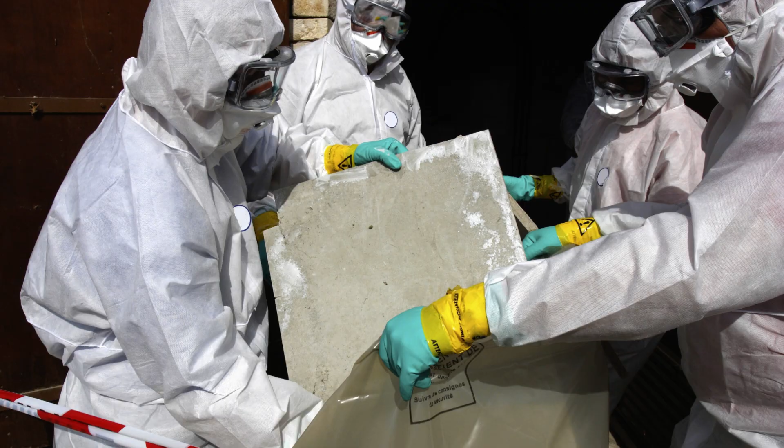Thank you for joining. I want to talk today about our current approach to managing asbestos and beyond 2026 as well. So, specifically looking at the challenges we already face and those that we may face in the future, and how we could be best placed to try and address those and maybe even solve some of those problems.

The duty to manage asbestos. It's been in effect since 2002 with the release of the Control of Asbestos at Work regulations when it was formally introduced in the UK. That means we've had 24 years now of the duty to manage. It also means we've had approximately 120 years of using asbestos in the UK with zero legal requirement for us to assess or manage the risks from asbestos in buildings.

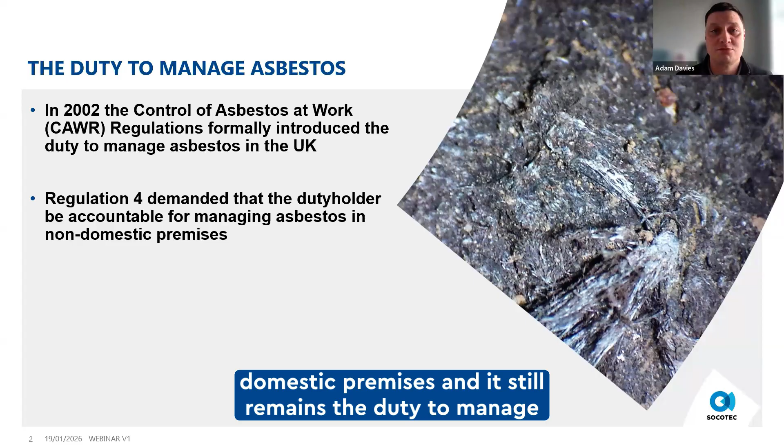It demanded, under Regulation 4, that the duty holder be accountable for managing asbestos in non-domestic premises, and it still remains the duty to manage in non-domestic premises. It demanded that a suitable and sufficient assessment is required to ascertain, firstly, do you have any asbestos, or is it liable to be present in the buildings? So an initial assessment to undertake and to ascertain whether there is any asbestos or not. Crucially then, where asbestos was identified or presumed, the duty holder then must employ a plan to prevent exposure.

Even though 2002 was the year that it was formally introduced, it remained mostly unchanged in the 2006 Control of Asbestos regulations and the current iteration of the regulations, CAR 2012. So we've now had at least 14 years since the latest iteration of the regulations. So what I want to explore is what has changed in these 14 years, how does that maybe impact on our approach to asbestos management, and then what we can do about that. There are things that we already have in existence that we could maybe employ, and maybe a different approach or mindset towards how we're currently managing.

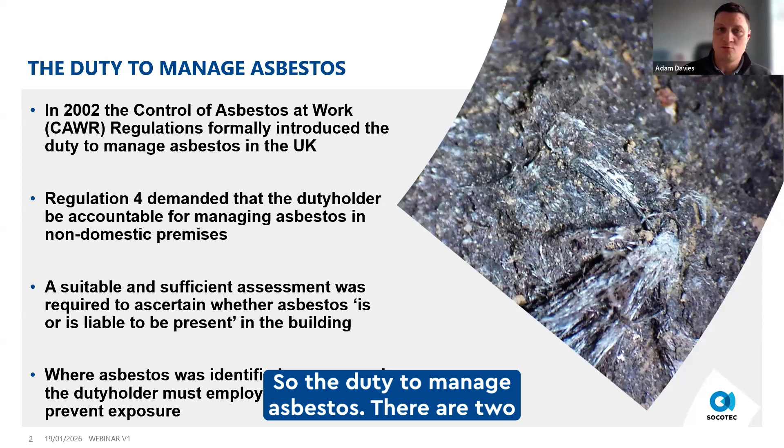I titled it, Can We Still Manage Asbestos in Buildings? Absolutely. I'm certainly not going to be talking about we need to get rid of all the asbestos, but we do have some challenges, and certainly lifespan is something I'll talk about. So the duty to manage asbestos, there are two elements really that I want to focus on in this webinar and certainly explore. So the first is Regulation 4.9.

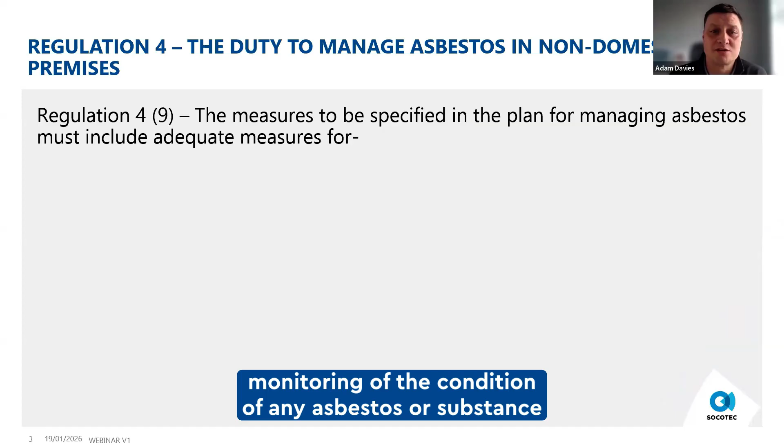The plan for managing asbestos must include adequate measures for the monitoring of the condition of any asbestos or substance containing or suspected of containing asbestos, and that we ensure that any asbestos or any presumed or likely substance is properly maintained or, where necessary, safely removed. So it's that adequate measures element, the continuous monitoring, and the maintaining or safely removing asbestos.

Our visual only inspections that most of us currently do, the re-inspections, they are only visual. Are they still an adequate measure for monitoring materials that have been in place for many, many years? Could it be argued that some ACMs can no longer be properly maintained and should therefore already be planned for safe removal? And then Regulation 4.10.

The duty holder must ensure that the plan is reviewed and revised at regular intervals and without delay, and then that little one, if there's reason to suspect the plan is no longer valid. It's quite often the case that we have a plan in place and it's regimented, every 6 months, every year, we review it. And it's just remembering that critical element: if there's reason to suspect it's no longer valid. Certain materials currently included on the plan may trigger an automatic revision if they're identified as being unable to be properly maintained.

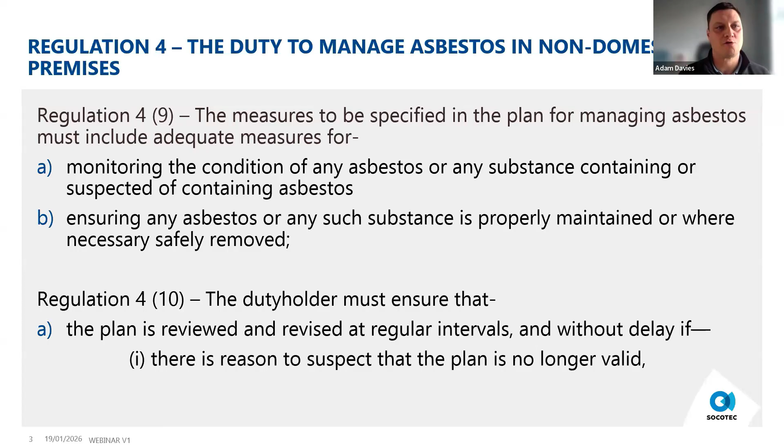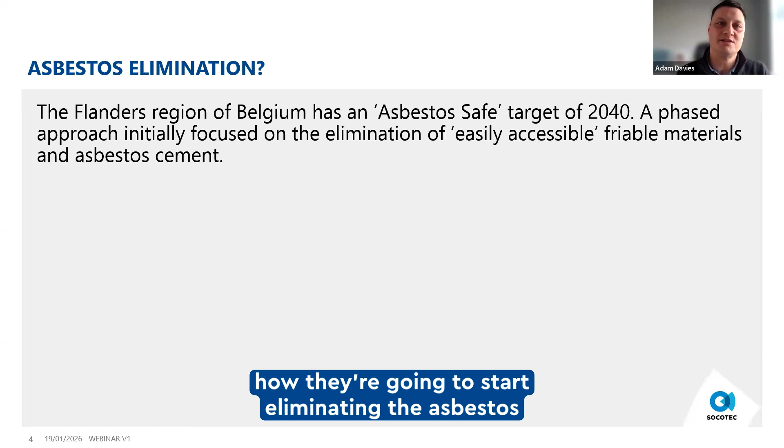So I'm going to keep referring back to these two crucial parts of Regulation 4 as we go through, but I thought it probably beneficial to start by looking at what other countries do and how it's led to our current thought about lifespans. So in terms of elimination, in the Flanders region of Belgium, they already have an asbestos safe target. They have a phased approach to the elimination of those ACMs that are easily accessible and friable. So AIB in a building that is easy for someone to access would be triggered for elimination from the building. And they're also focusing on asbestos cement as well. So Flanders already have this target, this vision, strategy of how they're going to start eliminating the asbestos materials.

In France, they currently have a mandatory at point of sale asbestos survey trigger. This was quite controversial when it was introduced, for simple reasons. If you were selling a house and the government told you you had to have an asbestos survey carried out on it, and that survey returned results that there's quite a lot of asbestos in your building, the price of your property may drop. You may even lose a sale based on that information.

So there was a bit of controversy at first, but what they've found in France is it's actually driving an elimination plan. Because if you have a building that you want to sell and it does have asbestos in it, it's in your interest to start eliminating those ACMs so that when it comes to the sale, you've got a building with a better rating.

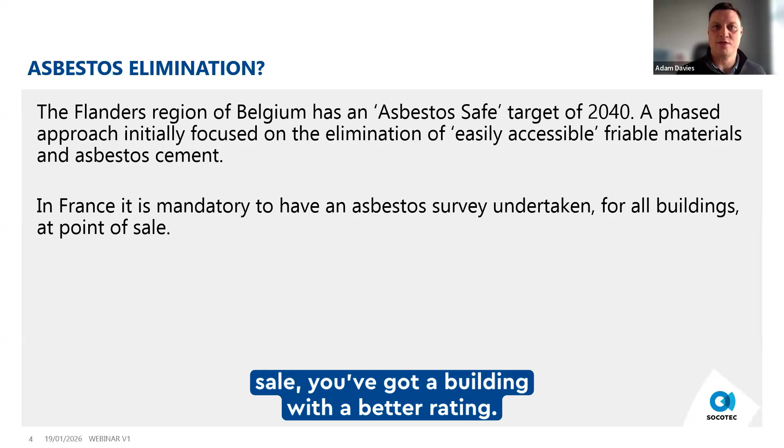And then in Australia, there's the Victorian Asbestos Eradication Agency, not to be confused with the Victorian era, which I quite often do when I see this come up. This has been established to prioritize and phase out asbestos from government-owned buildings in Victoria. They're a very proactive organization, and they produce lots of documentation which is available on their website.

And one of the parts of their documentation is a plan or a chart that they produced on the lifespan of asbestos materials. And this was used as part of the justification for why they eliminated asbestos from the government-owned buildings. And it's very interesting to look at.

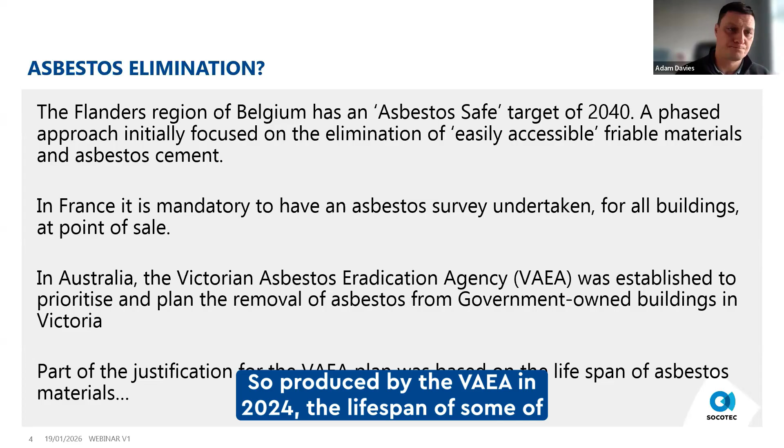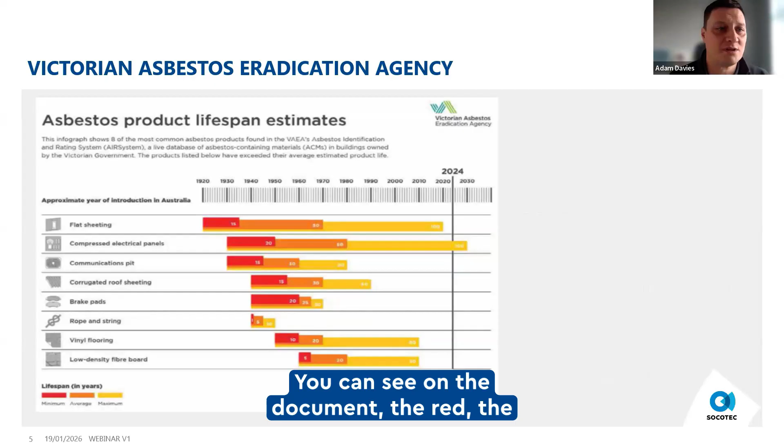So produced by the VAEA in 2024, the lifespan of some of the materials in their government-owned buildings was produced in this document. You can see on the document the red, the orange, and the yellow banners. Apologies, I don't know what size your screen is, but I do have some arrows to come in and give you some indications in a second. The red is the minimum life expectancy of the material. The orange is the average life expectancy of the material, and then the yellow is the maximum.

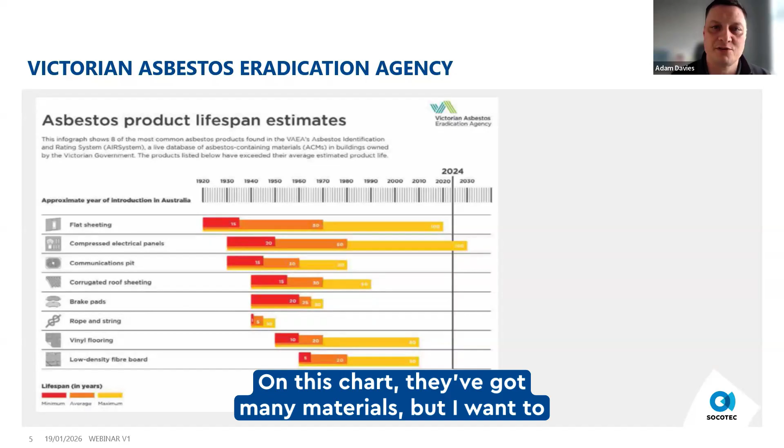So rather than focus on anything else, let's just look at the maximum, because that's the extreme of the material's expected lifespan. On this chart, they've got many materials, but I want to focus on three, really. At the top is the asbestos cement flat sheeting. You've got dates along the top there. They start at 1920 when they think flat sheeting was introduced in Australia.

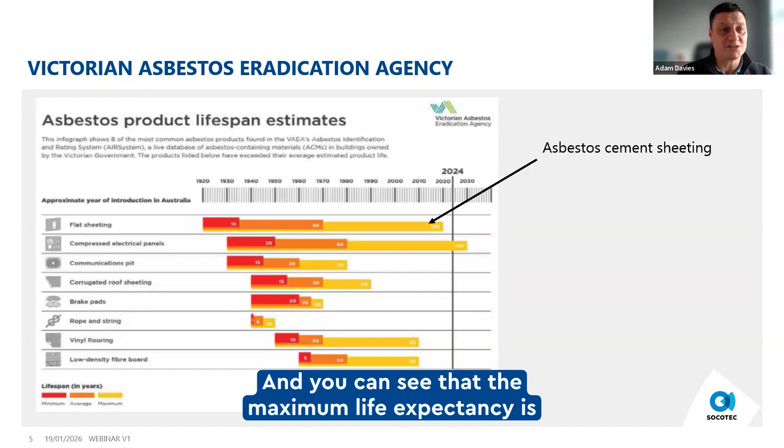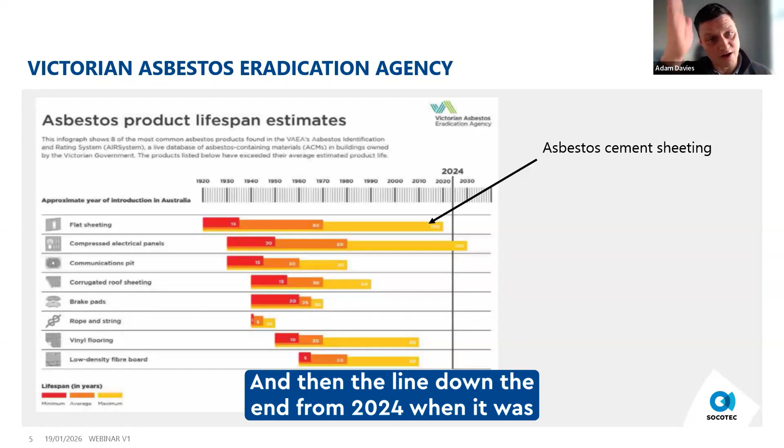And you can see that the maximum life expectancy is around 100 years, which would take us up to about 2020 on the chart. And then the line down the end from 2024 when it was produced is demonstrating that the very maximum life expectancy of that flat sheeting has already been exceeded.

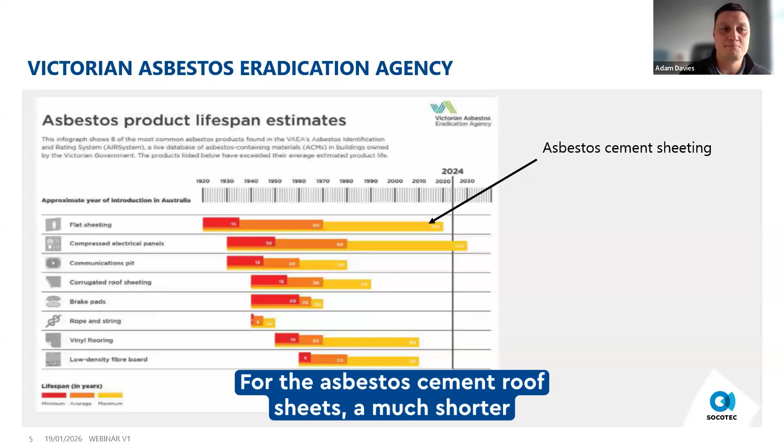For the asbestos cement roof sheets, a much shorter maximum lifespan. They're exposed to the elements. It's likely that there's going to be quicker degradation. So the maximum life expectancy of the external roof sheeting is down as 50 years. And you can see just how far that line of 2024 is away from the maximum life expectancy of that material.

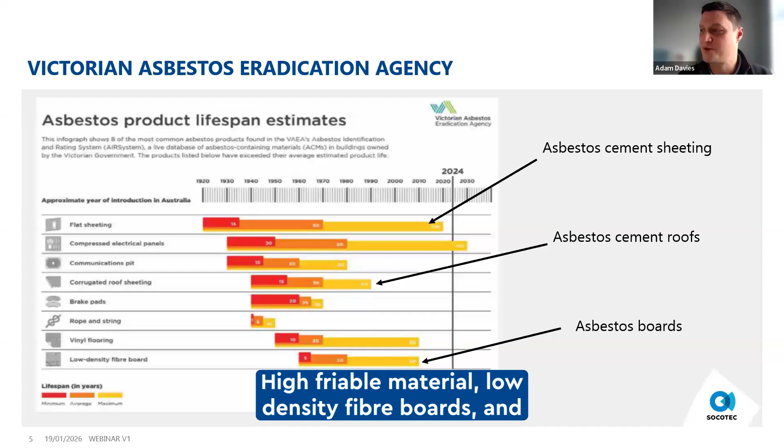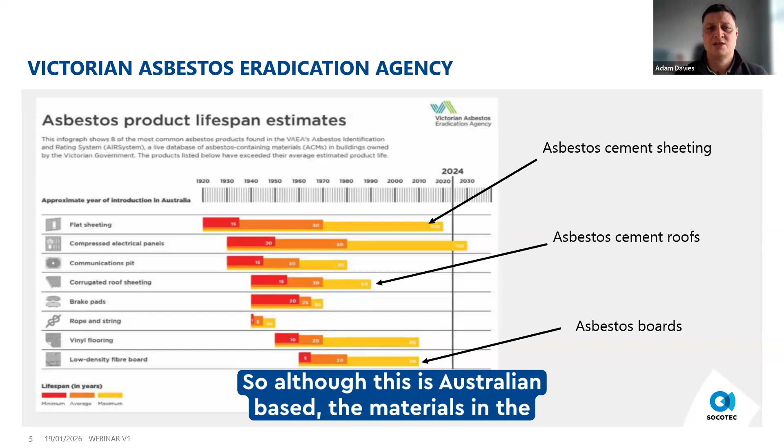And then at the bottom are the asbestos boards. High friable material, low density fiber boards, and again, maximum life expectancy of 50 years. So although this is Australian based, the materials in the UK can be expected to have similar lifespans. A lot of our asbestos cement in the UK would be 70 plus years old.

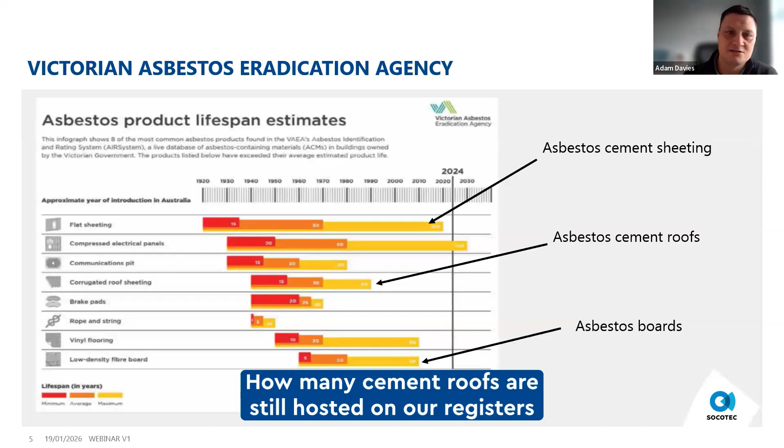And if that's the case, is it still considered adequate to rely solely on the re-inspections of materials to assess their risk? How many cement roofs are still hosted on our registers as manage and inspect at regular intervals, when actually safe removal is probably the most appropriate action based on their lifespan?

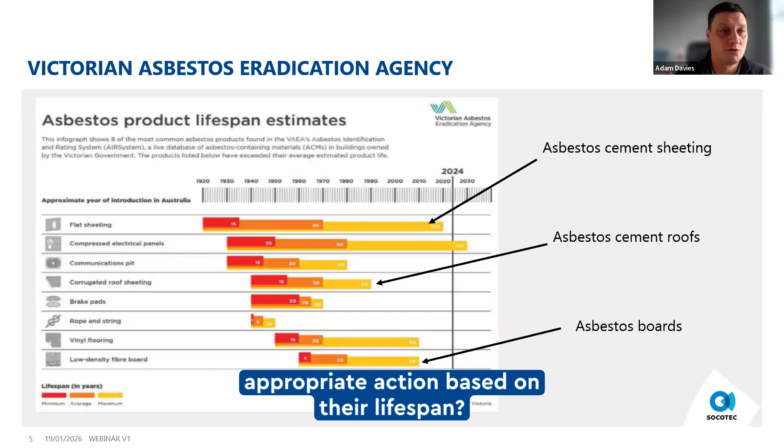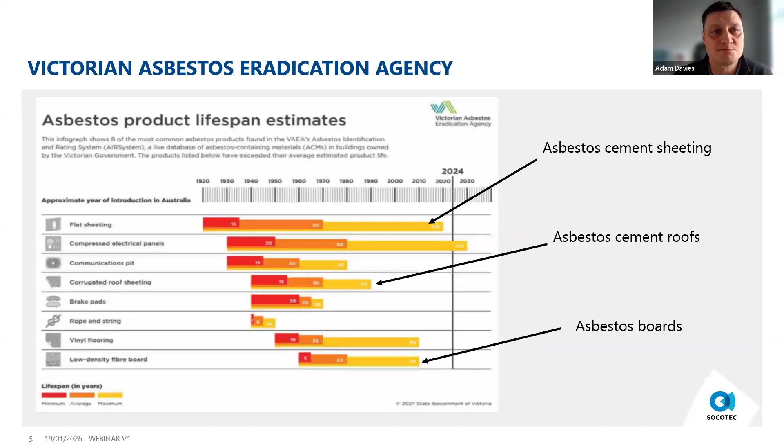Are we effectively managing the risk if we're waiting for materials to show signs of degradation or damage before we consider safe removal? I'd argue a proactive approach would surely be more appropriate in regards to preventing exposures, especially with high friable materials such as the asbestos boards. So with those three in mind, I put an example together of asbestos cement and some of the challenges we're currently facing.

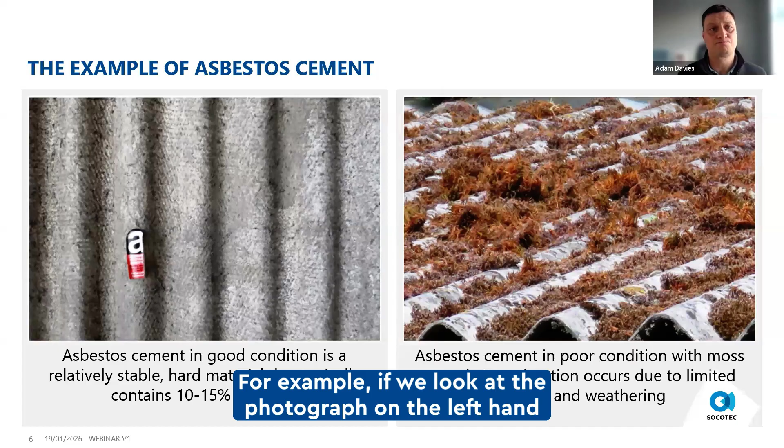So already we've got signs of degradation that could cause an issue in terms of re-inspections, but the moss lichen growth can actually be extended out into a lot of a bigger problem. For example, if we look at the photograph on the left-hand side, when that moss or lichen gets dislodged from the roof, they pull the fibers off. So now we've got a situation where the moss is actually loose chrysotile. That's how we would record it.

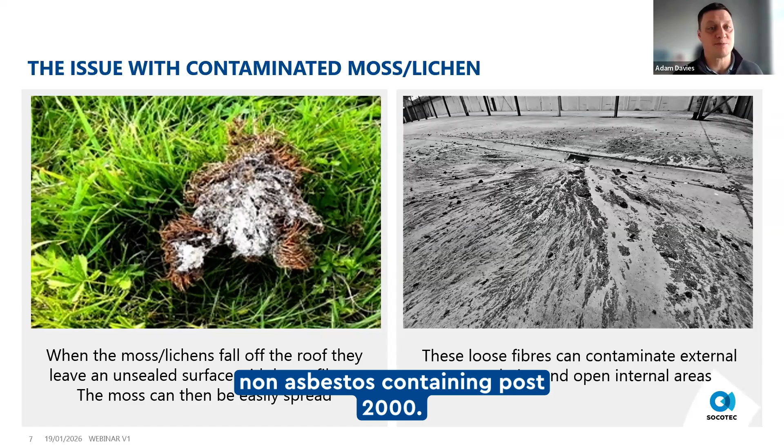This building's unlikely to be managed properly, and certainly the asbestos issue that we found would have not been managed effectively, because that building is down on the register and on the plan as non-asbestos containing post-2000. So from a simple photograph on the left-hand side that we saw earlier, cement on a re-inspection, yep, no problem with that, leave it on the register, manage in situ. All of a sudden, we've got major problems.

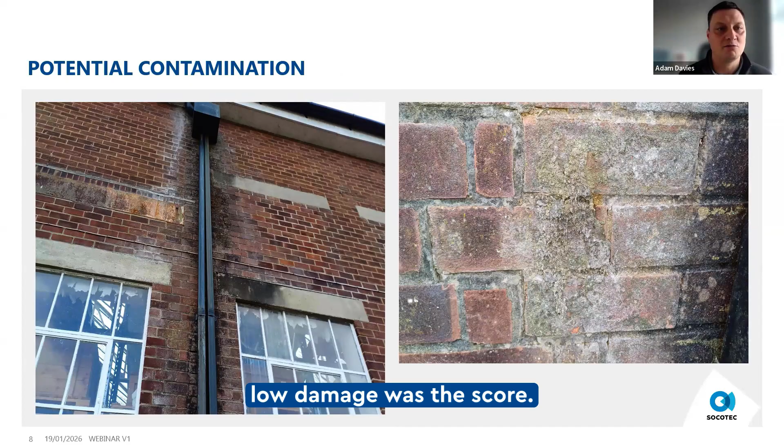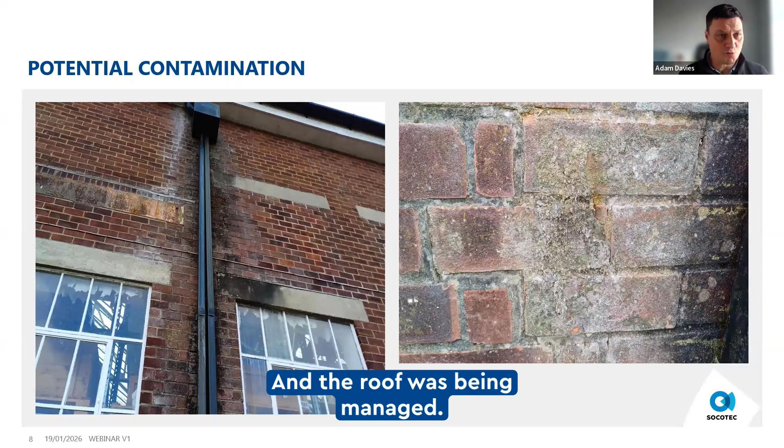And you can see on the next set of photographs how it can also affect in terms of potential contamination. That building, although you can't see it on the left-hand side, has an asbestos cement roof sheet. The re-inspections found it to be in reasonable condition, low damage was the score. In 1 year between the re-inspections, however, extreme heavy rainfall in that area produced a situation where the building now has pure chrysotile dripping down the external walls, as you can see on the photograph on the right-hand side.

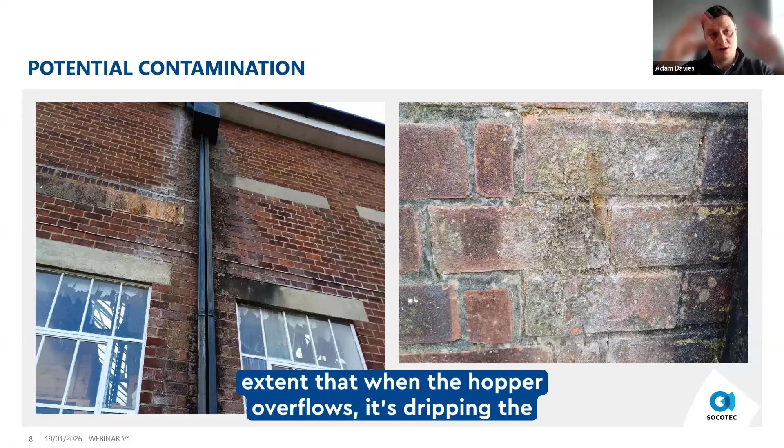So from ground level, the building looks in good condition, and the roof was being managed. But you can see that the roof can't be in good condition because the rain is washing loose fibers off to such an extent that when the hopper overflows, it's dripping the chrysotile down the walls. So when it dries, that's how it appears, like the photograph on the right.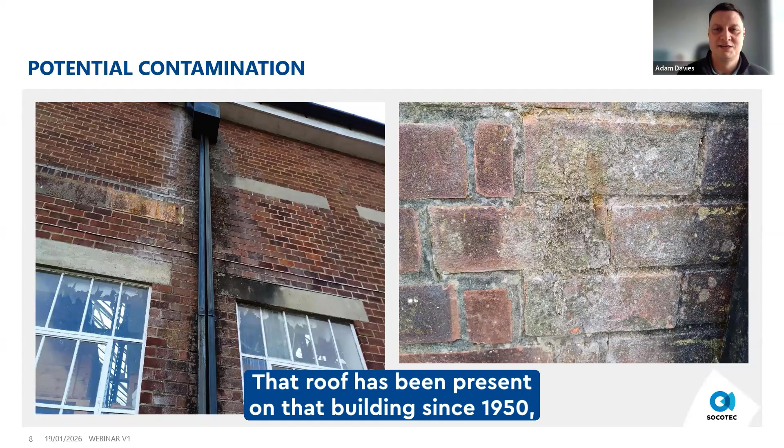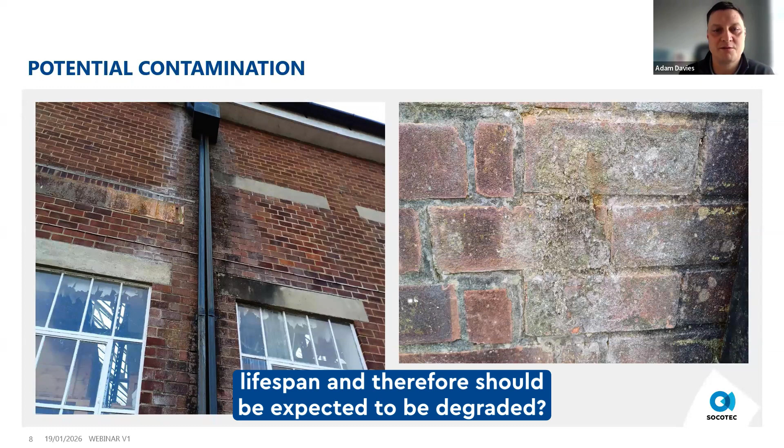Are we thinking about things correctly then? That roof has been present on that building since 1950, 70 plus years old. The lifespan must be exceeded. When we look at Regulation 4, bringing it back to that, can we effectively maintain a material that is past its lifespan and therefore should be expected to be degrading? Should the age of the material therefore trigger a review of our plan?

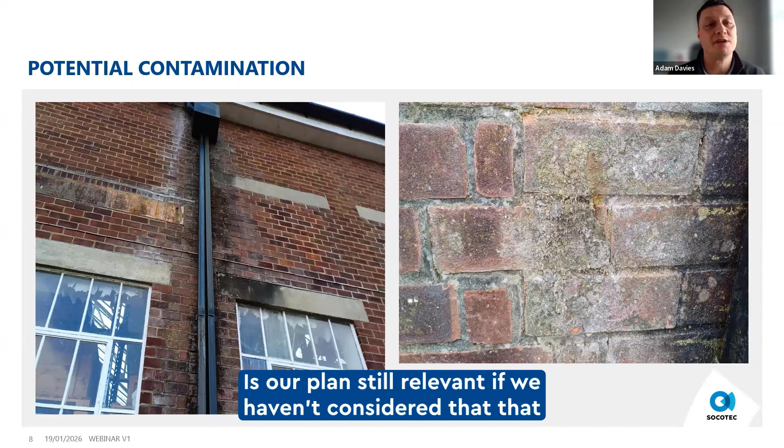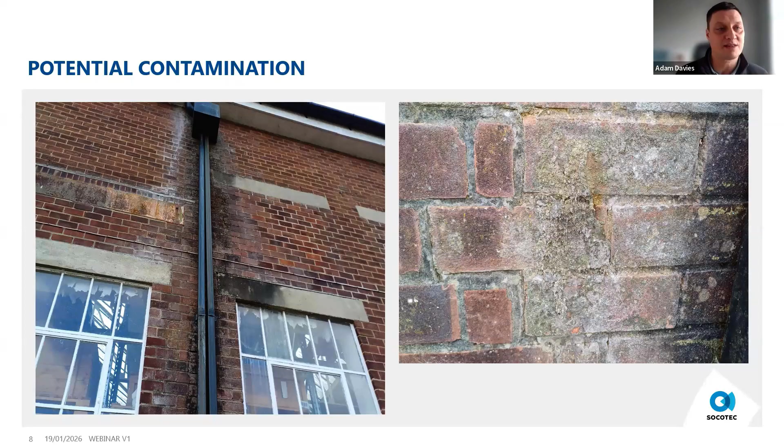Is our plan still relevant if we haven't considered that roof has been there for 70 years and this could happen? There's the argument that if it hadn't had that particularly heavy rainfall, if it hadn't overflowed, we still wouldn't have picked that up. We'd still be leaving that roof in situ and managing it. But we can see with what happened that clearly the guttering, the drain pipes, all of the drainage systems must be heavily contaminated as well.

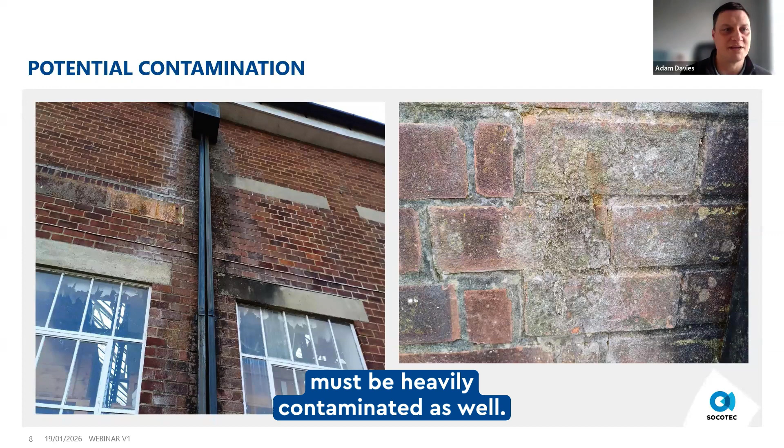It is important to reference Regulation 16 at this point. We do have a duty to prevent, or as far as reasonably practicable, reduce the spread of asbestos. Can we consider compliance with Regulation 16 if we're allowing moss and lichen to just remain on the roofs, not managing it, allowing it to come off, blow around, not just our site, but potentially into others as well? So that's the material's lifespan and how that can affect it.

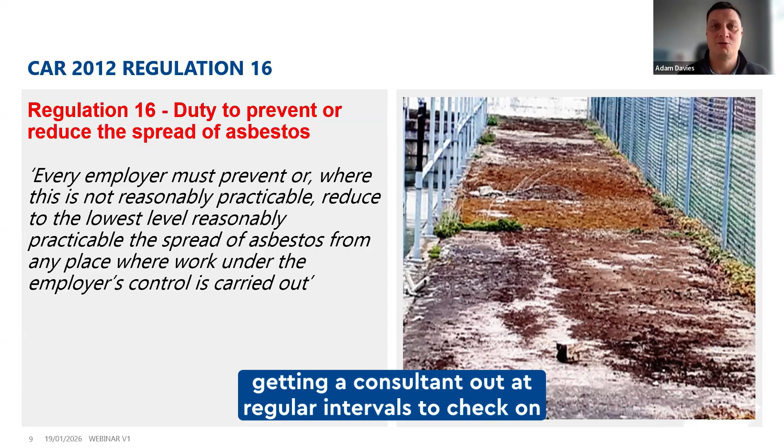But I want to move on as well to the actual monitoring of the condition and how we currently approach it. We are looking at visual re-inspections for the vast majority of the time that we're considering leaving materials in buildings in situ, and then monitoring them by getting a consultant out at regular intervals to check on the condition.

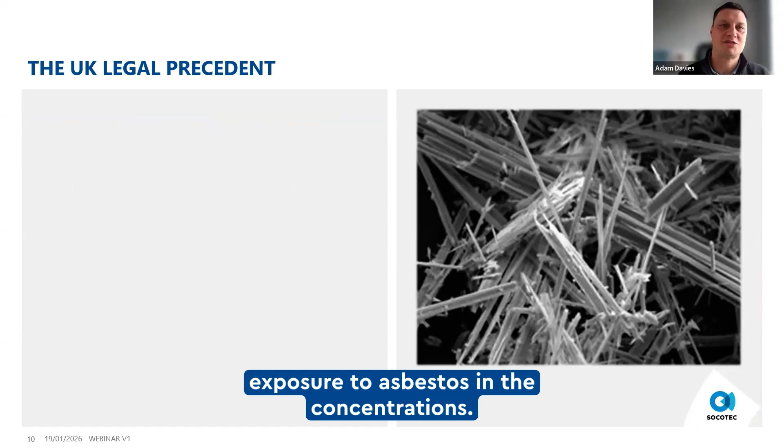There is a legal precedent in the UK in regards to exposure to asbestos and the concentrations. In 2009, there was a High Court hearing. Dianne Willmore, who actually won the case, but unfortunately passed away before the case was decided, won that court case based on the expert witness statement that mesothelioma can occur at low-level asbestos exposure, and there is no threshold dose of asbestos below which there is no risk.

It's mentioned in the Reporting of Injuries, Diseases and Dangerous Occurrences Regulations that a significant exposure to asbestos would be any exposure in a quantity sufficient to cause damage to human health. The difficulty we have is we cannot quantify that significant. It's why the legal precedent can be so important.

A level above that which is commonly found in the air in buildings and the general outdoor environment - you need to establish what that is so we can understand what the actual legal precedent is. The court found it appropriate to conclude each such exposure above the level commonly found in buildings materially increased the risk that she would develop mesothelioma.

So when we consider adequate measures for monitoring ACMs, it's worth us understanding what the background concentration is and what can exceed that. And the simple answer to what can exceed it is anything.

The accepted background concentration in the UK is typically taken from the 1999 DETR document on asbestos materials in buildings and airborne fiber concentrations. That document gives the approximate level of background fibers as 0.0005 fibers per millilitre - that's what we refer to as the background concentration.

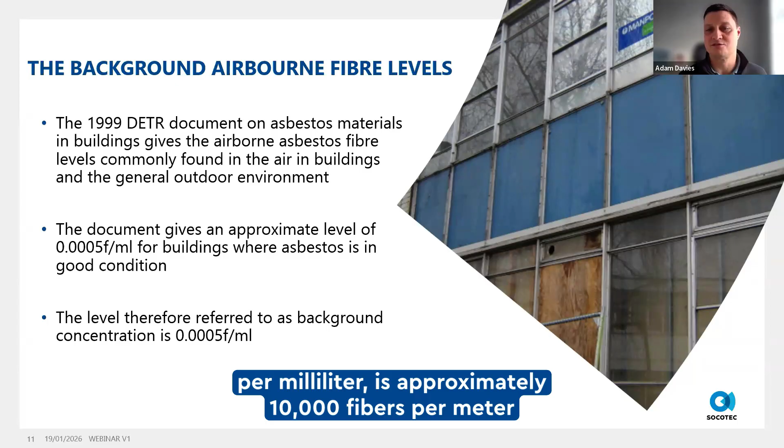That level equates to around 500 fibers per metre cubed of air. The current clearance indicator, which is 0.01 fibers per millilitre, is approximately 10,000 fibers per metre cubed - significantly higher than the expected background level.

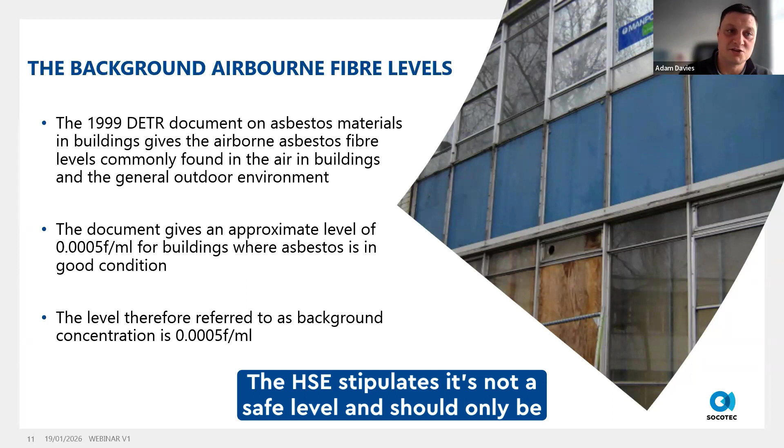The clearance indicator is just the level below which a room can be legally occupied following licensed removal. The HSE stipulates it's not a safe level and should only be taken as a transient indicator, not an acceptable permanent level.

So are we effectively managing risk without sufficient assurance of the airborne fiber levels following removal, returning to background concentration? We typically have fallen into removing asbestos under licensed conditions and receiving paperwork that says everything was below the clearance indicator, 0.01. The HSG 248 itself says that fiber levels should return to background concentrations.

I'd argue that not many of us are actually carrying out the background concentration level testing. Have we even ever established what our background concentration is for our buildings in comparison to what the accepted level is? I mean, it could be magnitudes lower. It could be around that.

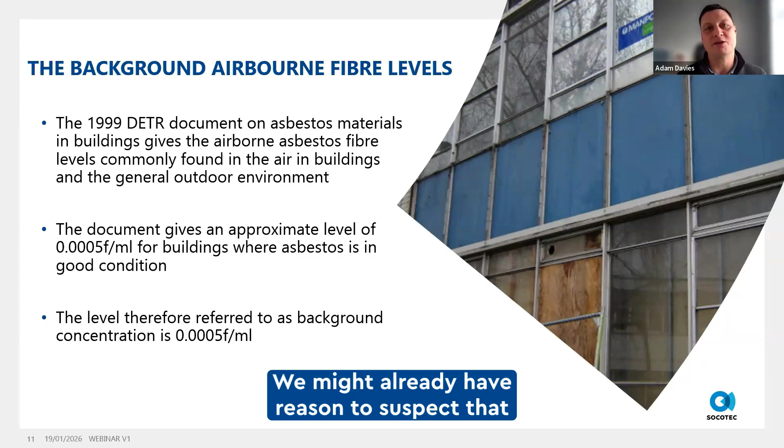You know, we might already have reason to suspect that something is going on, but without that test, we wouldn't know.

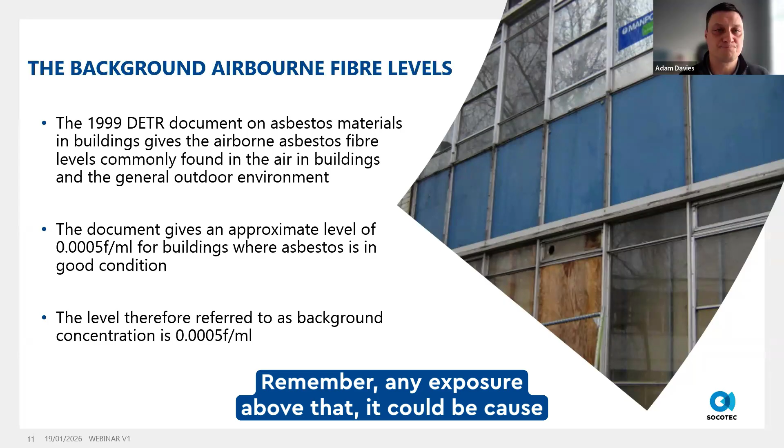So with the legal precedent being set as any exposure above 0.0005 fibers per millilitre, any lack of sufficient data may leave us vulnerable to future legal claims. Remember, any exposure above that could be cause for mesothelioma.

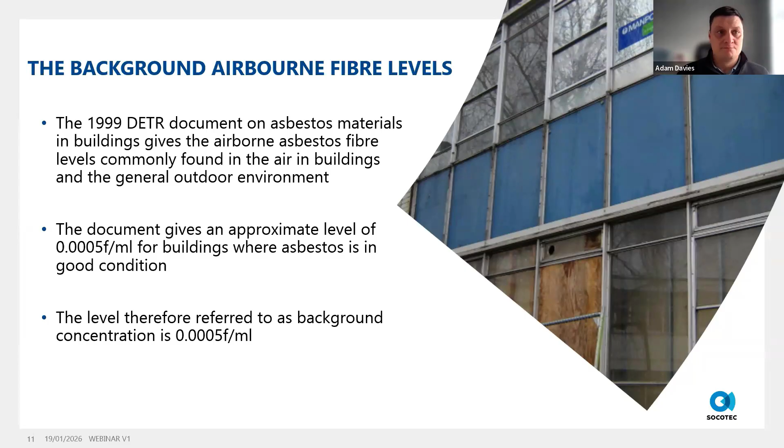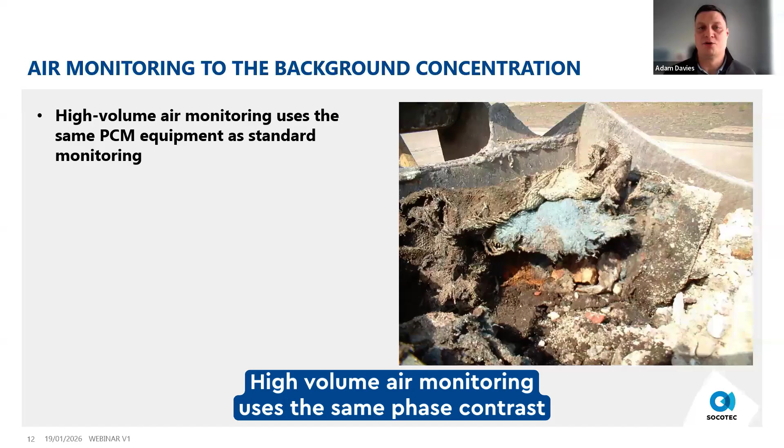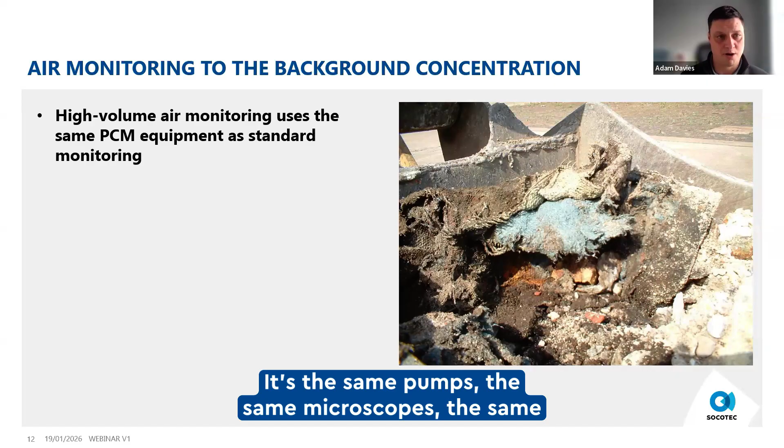How do we measure then to the background concentration? It's something that we already do. High volume air monitoring uses the same phase contrast microscopy equipment as any standard monitoring that you already have carried out. It's the same pumps, the same microscopes, the same personnel.

It adheres to the standards set out in the HSE guidance document, the HSG 248, as well as the ISO 17025 standard for UKAS accreditation. So there's nothing extra we have to do to allow anybody to carry out this type of monitoring. And it uses the same World Health Organization counting rules as the phase contrast microscopy - so again, there's no additional requirement.

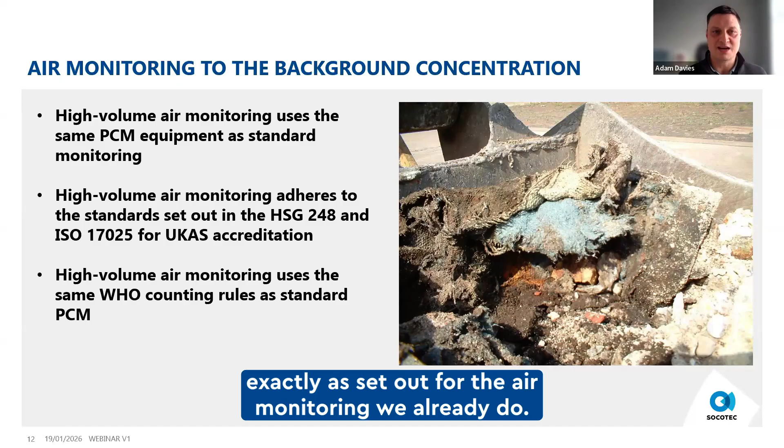It's exactly as set out for the air monitoring we already do. And in addition to that, it's recommended that we carry out high volume sampling in the HSG 248 and in CIRIA guidance on asbestos contaminated soils.

In a nutshell, if we increase the volume of air that we collect in the air sampling equipment, and then increase the amount of graticules that we count under a microscope, it is possible to calculate the limit of detection down to the 0.0005 fibers per millilitre, or the background concentration.

So we're not reinventing the wheel. It's something that's already recommended, we can already carry out, but not many of us, I would argue, do.

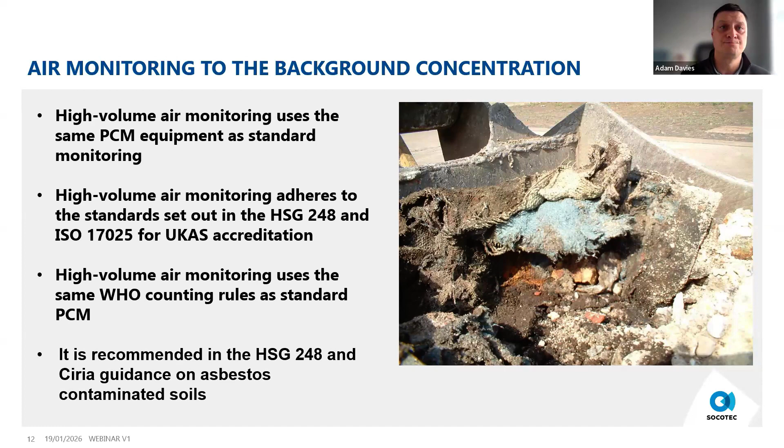Is it a limitation of Regulation 4 that there is no legal requirement for air monitoring as part of our effective asbestos management? I've already touched upon the fact that re-inspections are typically visual only. If the materials have been identified as having any low levels of damage, for example, there is the potential for airborne fibers.

Should we be undertaking air monitoring whenever the condition scores change? And if we are carrying out air monitoring because of that, should we be doing it down to the background concentration or just reporting it to the clearance indicator?

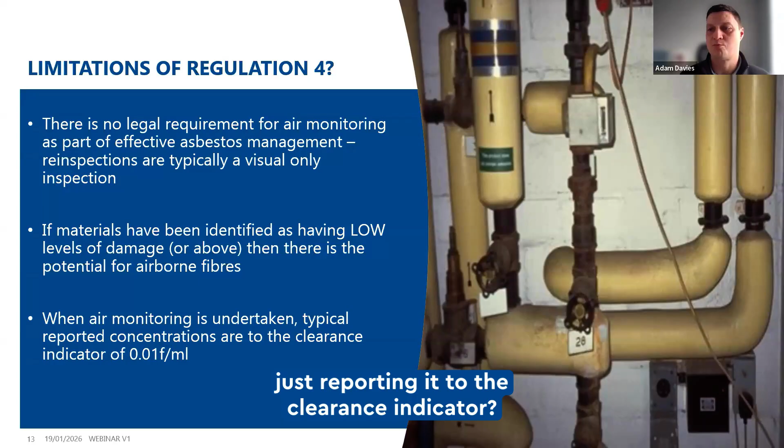I'd argue with no regular air monitoring, how can we be assured that airborne fiber levels are at or below background concentration, especially when we are managing the more friable materials in a building?

If the air test results we're receiving are only to the clearance indicator, we haven't actually established whether exposures are above background, or whether above-background concentrations are still possible. Therefore, with any ACM that is damaged, if we just run a snapshot pump for an hour, are we getting the full picture?

Especially if we don't know what the original background concentration would have been before the incident. Any damage to an ACM, by its nature, is also evidence that the management plan should be reviewed or revised. Something has gone wrong - what was it? The management plan needs to be reviewed to see if the control measures are still effective, or if the risk assessment was undertaken accurately. How often is that taking place, and are we recording that we're doing that whenever there's a report of any damage?

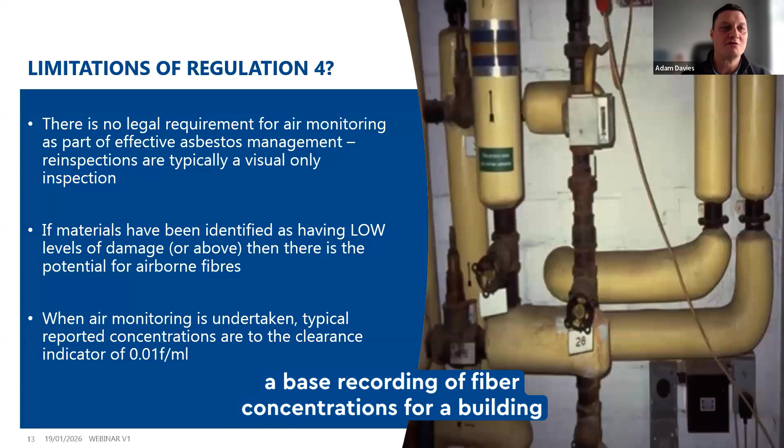Although air monitoring is not a requirement of Regulation 4, it can be argued that to demonstrate we are undertaking an adequate monitoring regime, a baseline recording of fiber concentrations for a building managing ACMs would provide additional assurance that the initial risk assessment for the material was undertaken accurately and is still relevant.

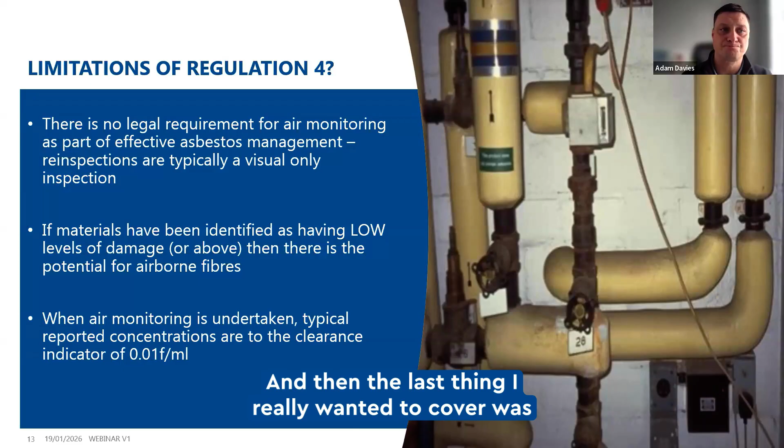The last thing I really wanted to cover was education on asbestos management and how that can really have an impact on effective management.

Regulation 10: information, instruction, and training. In the Approved Code of Practice for the regulations, L143, paragraph 232 stipulates that asbestos awareness training should be given to employees whose work could foreseeably disturb the fabric of a building and expose them to asbestos, or who supervise or influence the work.

Asbestos awareness training can be face-to-face, an online module, or a combination of face-to-face and online delivery. The Approved Code of Practice specifies trades such as maintenance, refurbishment, and allied trades that should receive asbestos awareness training. I always find that difficult.

The statement up there is quite clear - why you'd specify beyond that, I don't know. I have met people over the years who have looked at the list of trades given as an example in the ACOP and said, 'well, we're not on there, we don't need it.' I don't think you need to qualify beyond that statement: anybody whose work could foreseeably disturb the fabric of the building, or those who supervise or influence such work.

Although awareness training is often delivered in line with regulation, the depth of information within the courses can vary wildly. The Approved Code of Practice gives a bit of detail on what should be covered within awareness training, but that detail within the elements it covers can be interpreted differently, delivered poorly, or lack any context in the training.

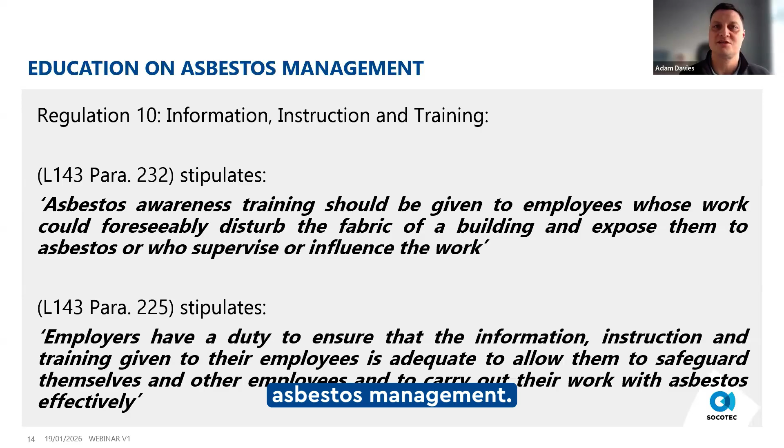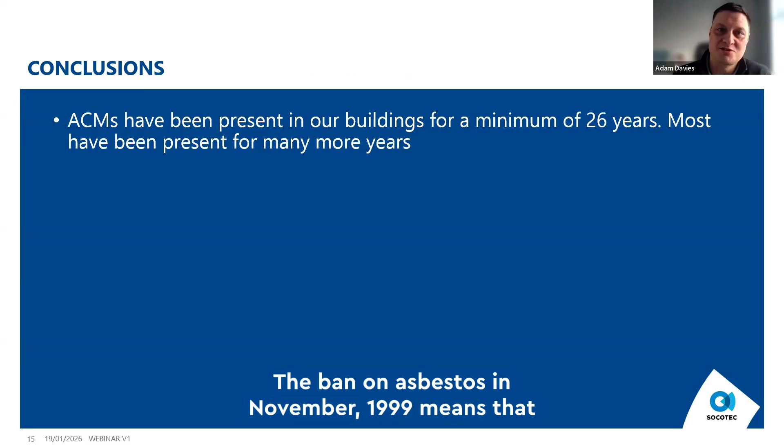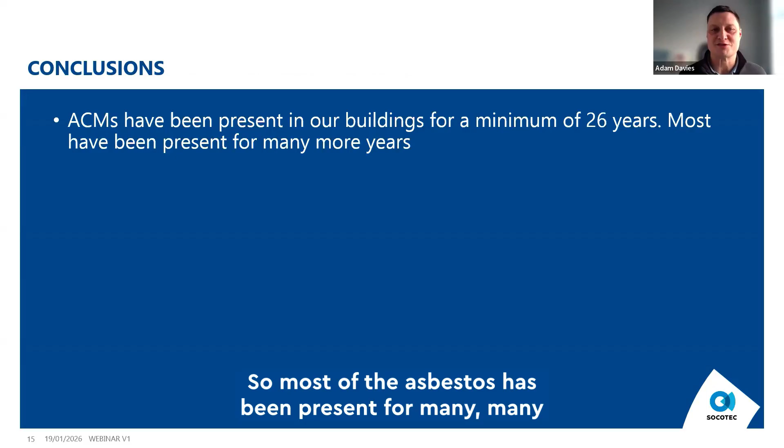In conclusion, then, these ACMs have been present in our buildings for a minimum of 26 years. The ban on asbestos in November 1999 means that the youngest asbestos we have is 26 years old, or should be. So most of the asbestos has been present for many, many more years than 26.

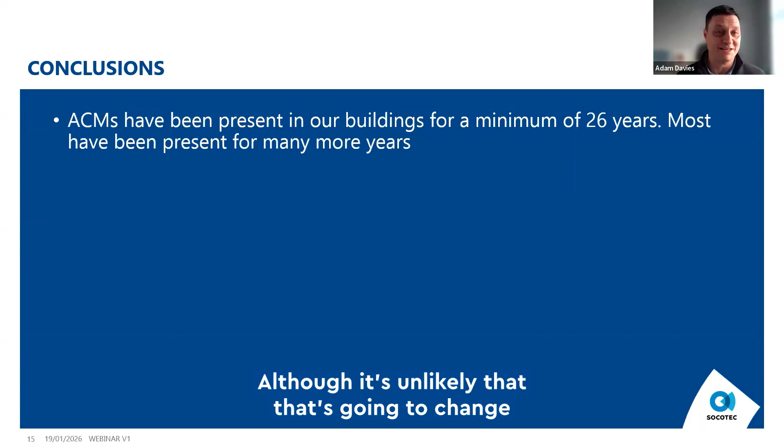Leave-in-situ is the default position for asbestos management. Although it's unlikely that that's going to change anytime soon, have we become too eager to leave asbestos alone rather than consider safe removal as part of a proactive approach to preventing potential exposures?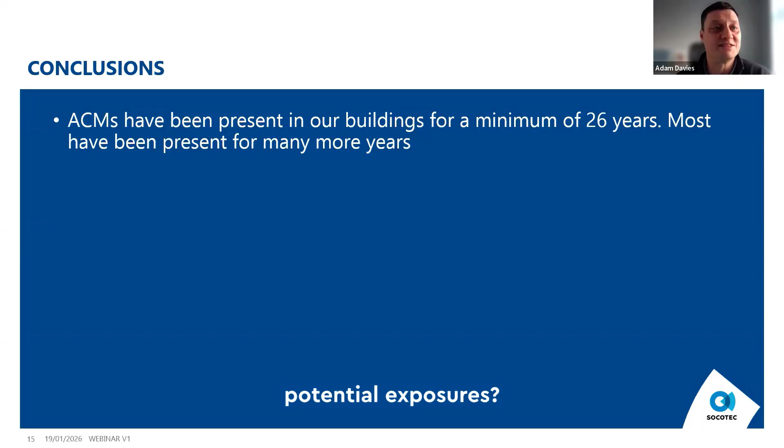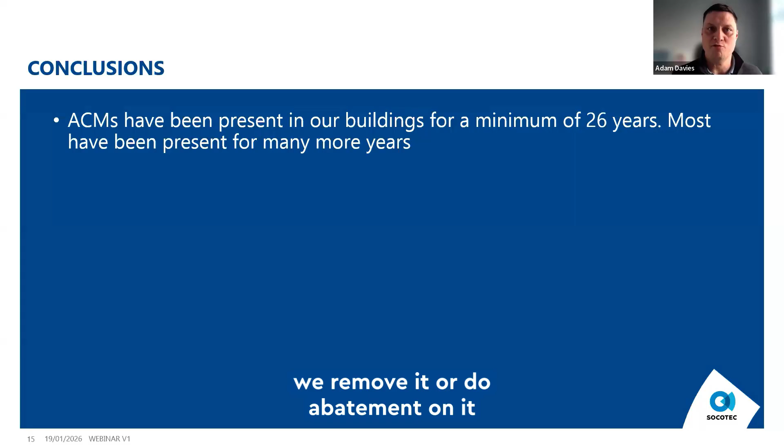It makes sense under Regulation 11 that our first thought is to not disturb asbestos to prevent exposure, and only when we need to that we remove it or do abatement on it, so that we've prevented as long as we can before we have to reduce. But it is strange that almost every other health and safety issue we have, the control would start at elimination in the first place.

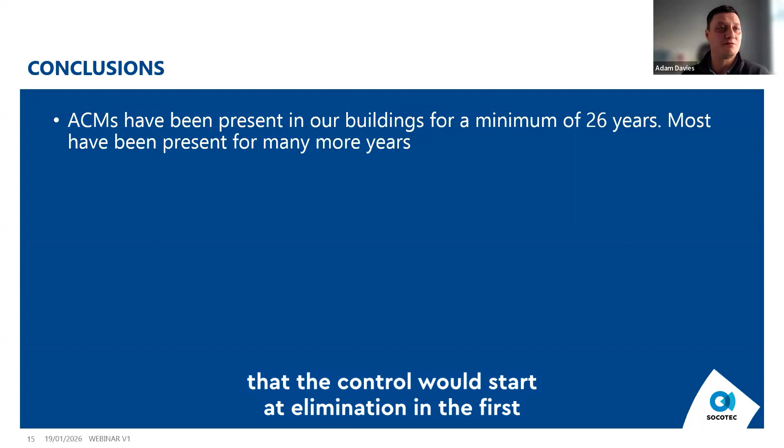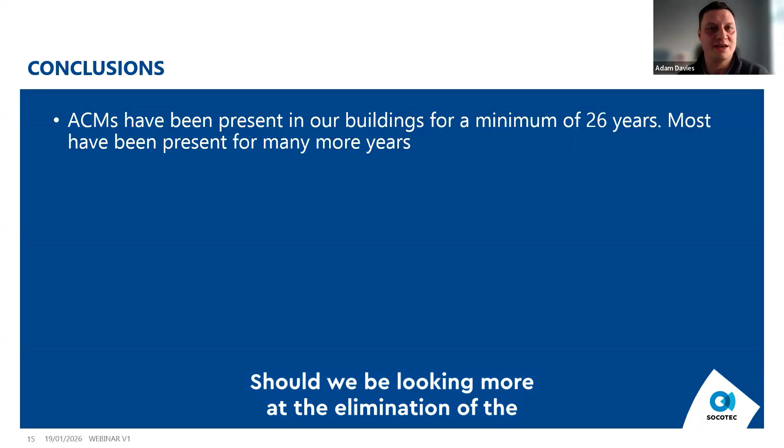So it's trying to amalgamate those two options. We will leave in situ as often as we can, but are we too eager to leave it? Should we be looking more at the elimination of the risk, the hazard in the first place?

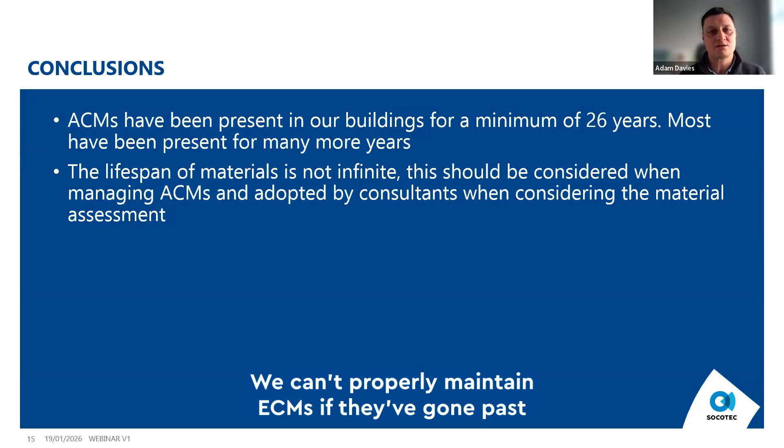The lifespan of these materials is not infinite. We've seen a chart of some of them. Every material will have different lifespans, and materials in different locations and environments are going to last longer or shorter than others. But we should take into consideration the lifespan of the ACMs when it comes to managing them. And certainly we need to get the consultancy side as well, considering that when it comes to the material assessment. We can't properly maintain ACMs if they've gone past their lifespan.

So we should be looking at the safe removal of those materials. And certainly, like we saw with the cement roofs, if they're covered in moss, they should be receiving material assessment scores for the condition that reflect the obvious degradation that we can see.

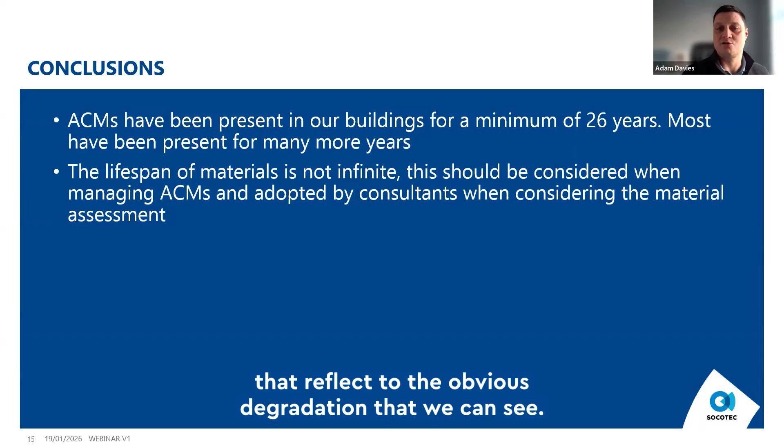An effective management plan should consider an elimination plan for aging materials and friable materials. Materials found to be or likely to be past their lifespan should trigger a review of the management plan to explore the option of removal.

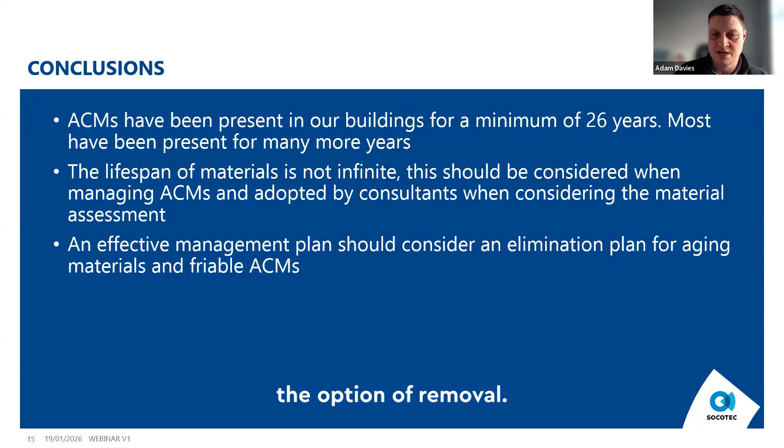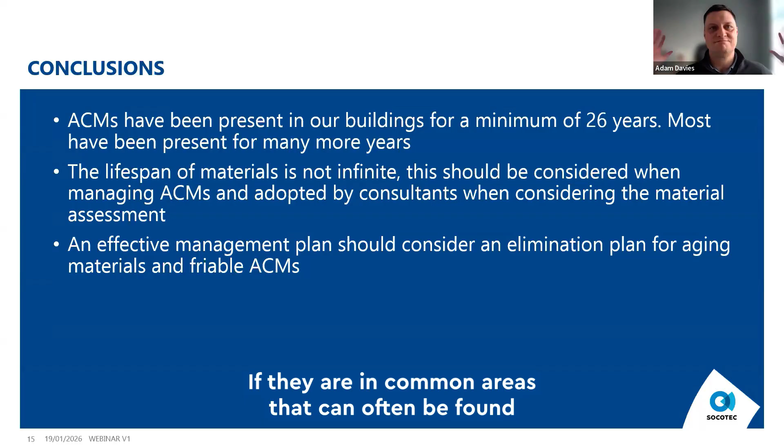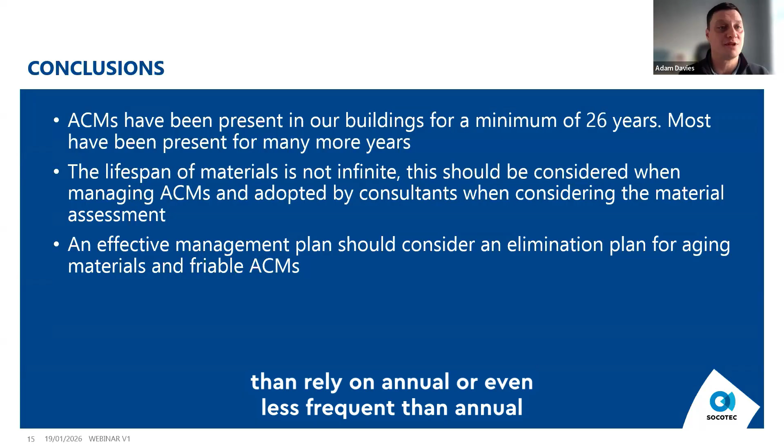Friable materials will release significant quantities of asbestos fibers if disturbed. If they are in common areas where it's reasonable to expect they can be disturbed without effective control, then the plan should be there to eliminate these rather than rely on annual or even less frequent re-inspections of the materials.

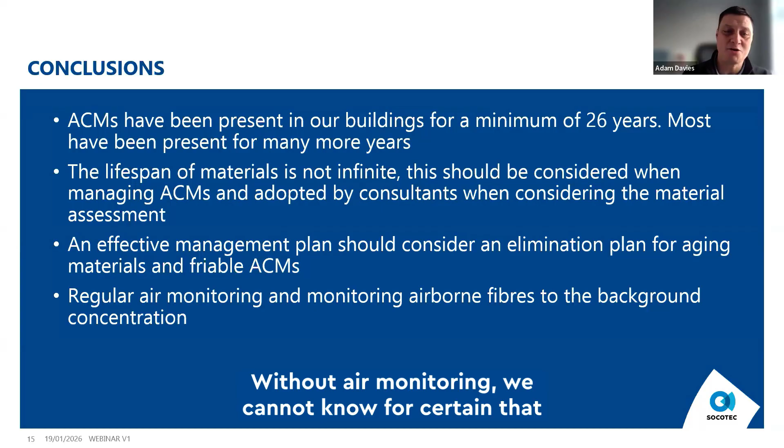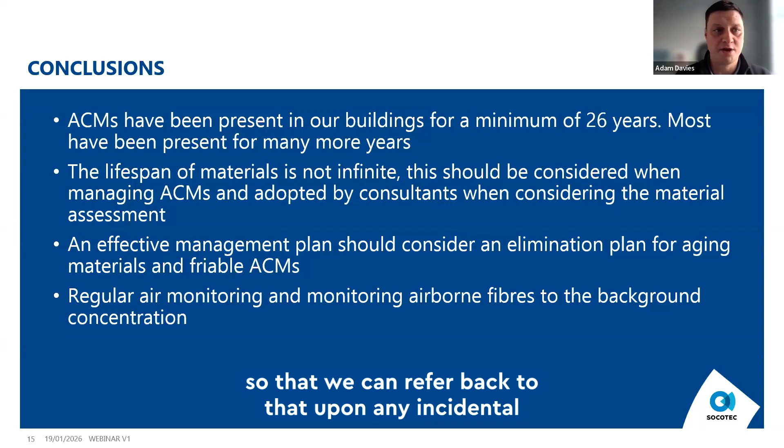Should we be considering regular air monitoring for our buildings and monitoring airborne fibers against the background concentration? Air monitoring can provide us assurance that the materials we leave in the buildings aren't releasing fibers. Without air monitoring, we cannot know for certain that materials are being effectively monitored, even more so with friable materials. And certainly measuring to background concentration would give us an initial starting point to understand our building's background concentration, so that we can refer back to that upon any incident or removal work undertaken.

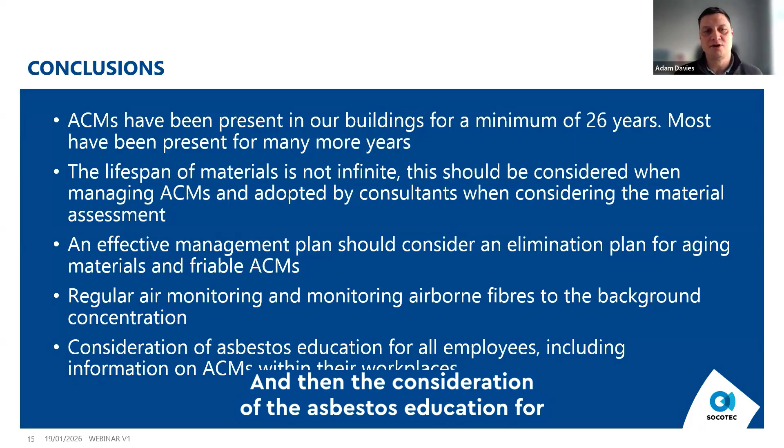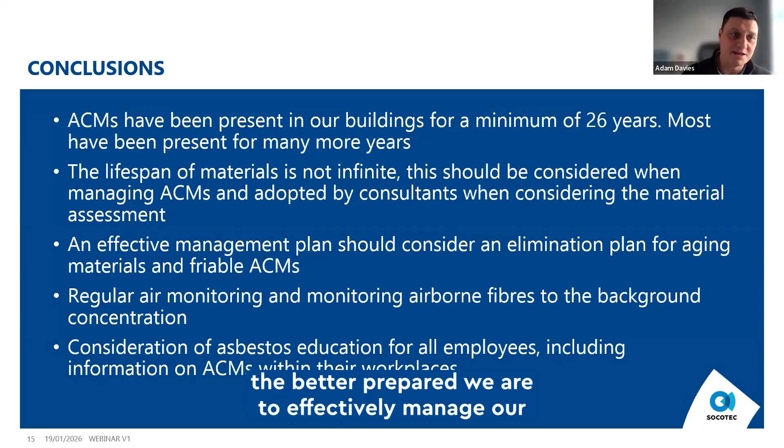And then the consideration of asbestos education for all employees, including information specific to the ACMs in their workplaces. The more accurate information that our employees have on how to avoid the risks from asbestos, the better prepared we are to effectively manage our ACMs through promoting a safety positive culture.